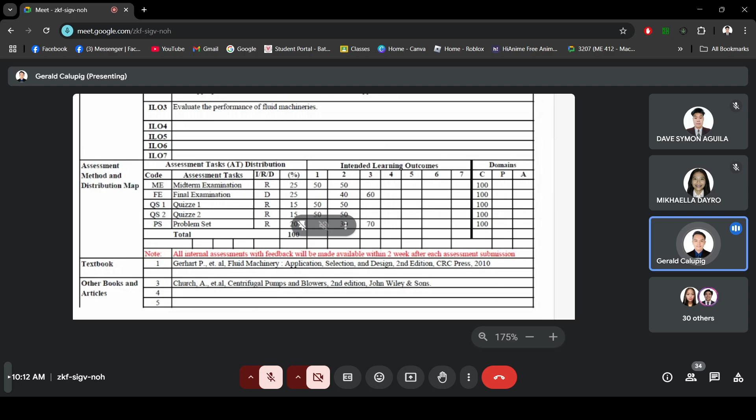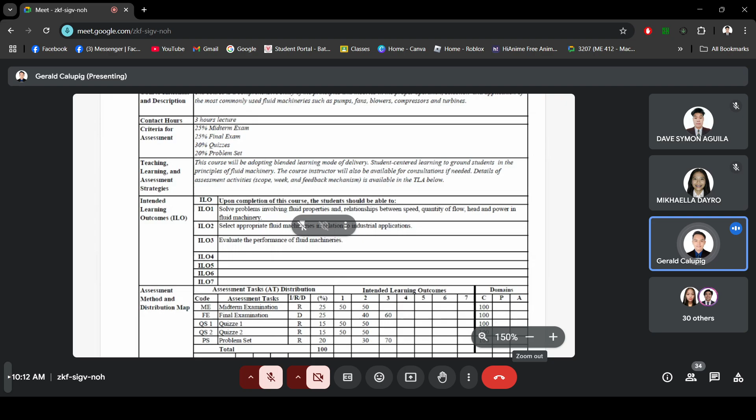So for your textbook, we have Fluid Machinery: Application, Selection, and Design by Gerhart, second edition. It is also available online, so you can download it if you can, and let me know if you cannot. Also, I think from the last semester we have an instructional manual. You can use that also. The institutional graduate attribute statement, student outcome statements, CDIO skills, and SDG skills were already discussed to you in other courses.

So let's proceed to the course policies. The grading system adopted by this course is as follows. Excellent 1.0, 98 to 100. Superior 1.25, 94 to 97. Very good 1.5, 90 to 93, 1.75, 88 to 89, 2.0, 85 to 87, 2.25, 83 to 84, 2.5, 80 to 82, 2.75, 78 to 79, 3.0, 75 to 77. Failure 5.0, below 70, and incomplete. Students who got a computed grade of 70 to 74 will be given an appropriate remedial activity in which the final grade should be either passing or failure.

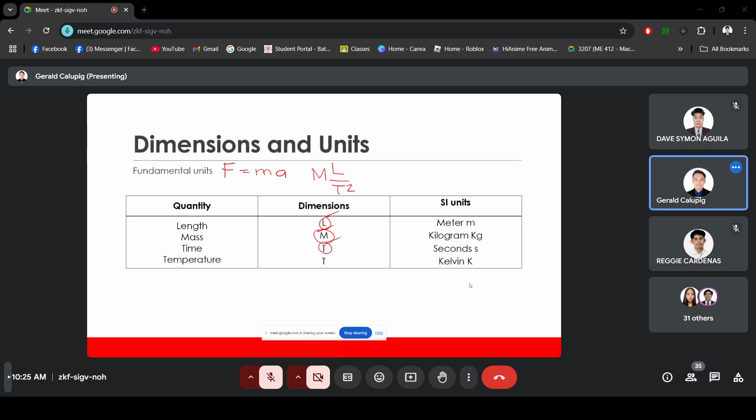So next is the derived units. For the derived units, we have the quantities of area, volume, velocity, density, pressure, work, power, viscosity, and flow rate. Under area, we have the dimension of L squared, length times length, or length times width. But since we denote that the dimension is L for the length, or in terms of meter, we can have L squared. For the volume, we can have L cube, which is the unit of m cube.

For the velocity, L over T, or length over time, we can have m over s, meter per second. For the density, we have mass over the volume. So your dimension will be M over L cube, or kilogram per meter cube. For the pressure, we have Newton per square meter, or force over area. For the pressure, we can have Pascal, right? For the dimension, you have M, mass over LT squared, right?

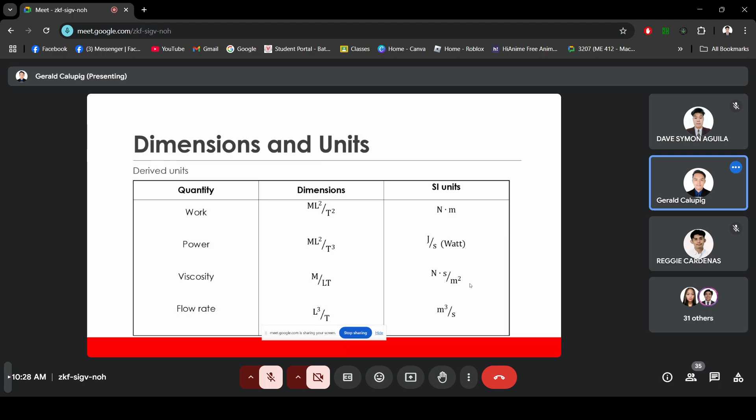But basically, we will not confine our discussion to the SI unit, but we can have English units, since some of our equipment here in the Philippines are measured in English units, such as the HP for the pumps. For the blowers, we can have also the CFM. Right? So, for the motor, basically, they are also in HP. So, basically, we can use both systems of units, the SI and the English units or the British system of units. Okay.

So, also, we have the non-dimensional quantity. Please recall this from your thermodynamics, physics, and I think some of those are used in mechanics. What is the non-dimensional quantity? A non-dimensional quantity has no unit but only a number. The common dimensionless parameters in fluid mechanics and hydraulic machines are identified as follows. For the Euler number, we have pressure force over the inertial force. So we can derive Eu is equal to change in pressure over density times V squared, right?

For the Reynolds number, we have the inertial force over the viscous force. So we can have the Reynolds number formula. For the Froude number, we have the inertial force over the gravity force. We can have V over square root of LG. For the Mach number, we have inertial force over the compressibility force, so we get V over C. Okay. Then for the Weber number, we have the inertial force over the what? What is our formula for the Weber number? How was it derived? Weber number is inertial force over the surface tension force. For the Strouhal number, we have the centrifugal force over the inertial force.

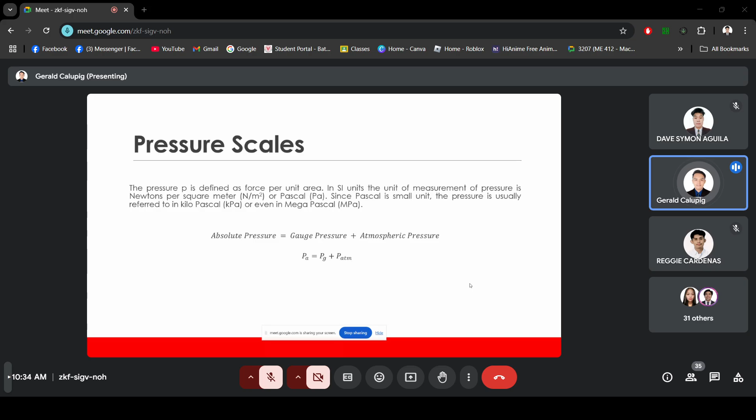So, for understanding, I have here the illustration of your pressure scale. Many get confused here when getting the pressure head. Sometimes some don't get the pressure right, since their interpretation is wrong. Wait a moment.

Okay, for the pressure, the gauge pressure or the pressure gauge is pressure recorded in a gauge or manometer. In engineering calculation, the absolute pressure is used, and we convert from gauge pressure to absolute pressure.

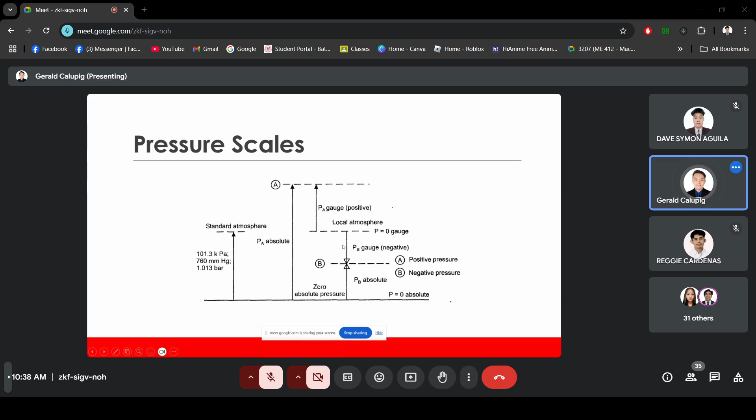Okay. Paano po sir kapag ang gauge is negative? So our gauge pressure, when it is negative, is considered a vacuum, right? So P absolute will be atmospheric pressure minus the gauge pressure. So your absolute pressure is below the standard atmospheric pressure since you have point B for the negative pressure. Please be familiar with this.

So in fluid properties, I think we have four fluid properties. Under that we have specific weight or density. A fluid is a state of matter in which the molecules are relatively free to change their position with respect to each other but restricted by cohesive forces so as to maintain a relatively fixed volume.

A liquid occupies the shape of the vessel. So in this topic, we have the more common fluid properties. Under this, we have density and specific weight. Fluid density is defined as mass per unit volume. A fluid property directly related to density is specific weight, or weight per unit volume.

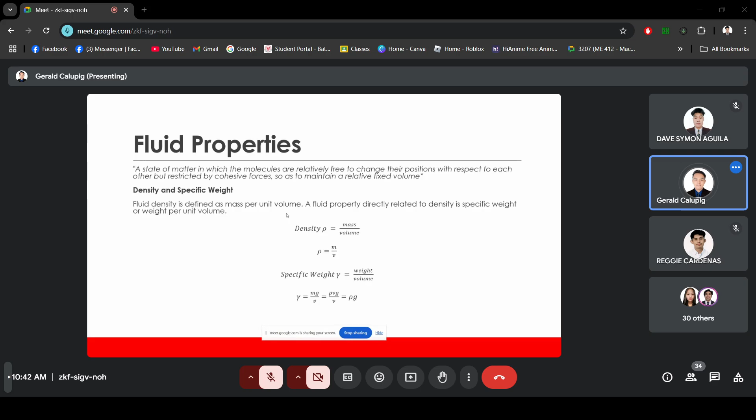If wala na, remind ko lang kayo: for water at standard condition, we have a density of 1,000 kilograms per cubic meter. For the specific weight, please be reminded to use 9.81 kN per cubic meter, right? And the specific gravity of water is 1. Okay, next.

So we have viscosity. In viscosity, we have shear stress. Shear stresses are developed when the fluid is in motion, if the particles of the liquid move relative to each other so that they have different velocities, causing the original shape of the fluid to become distorted. A fluid at rest has no shearing forces.

The fluid in contact with the boundary sticks to it and therefore will have the same velocity as the boundary, right? So given this velocity profile, if we consider the successive layers parallel to the boundary as shown in this figure, the velocity of the fluid varies from layer to layer in the y direction. Okay.

So we can have the formula for tau or shear stress, since you have a change in u with respect to y, kita ba? In every dynamic velocity you have a change, we have delta u, du, right? So tau is the shear stress and mu is the dynamic viscosity. The du over dy is what? The velocity gradient. Since yun yung laging may change with respect to y.

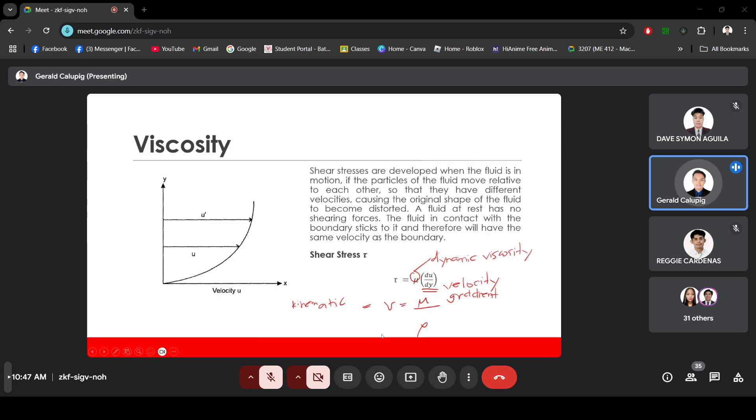So, basically, ang need lang natin na gamitin is yung mga Newtonian fluid, right? So, ano yung mga Newtonian fluid? Give an example of a Newtonian fluid. Any idea from the class? May idea po ba kayo from your previous course? So, ang Newtonian fluid is considered a common fluid, such as water, air, oil. Non-Newtonian fluid is not obeying the Newtonian law of viscosity, such as milk, plastic, paints. Okay.

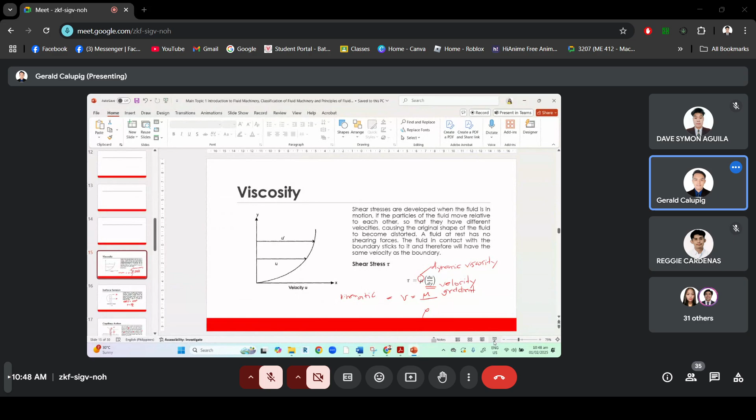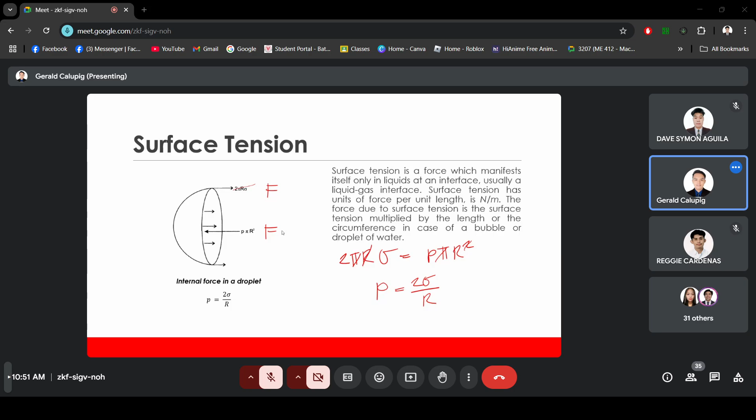Then, kapag siya is pressure, yung nasa gitna, force is equal to P times pi times R squared. In getting the force, we can have P is equal to what? 2 sigma over R, right? Or 2 times the surface tension over the radius. Baka hindi pa alam yung circumference: 2 pi r. Okay. Next, fluid properties.